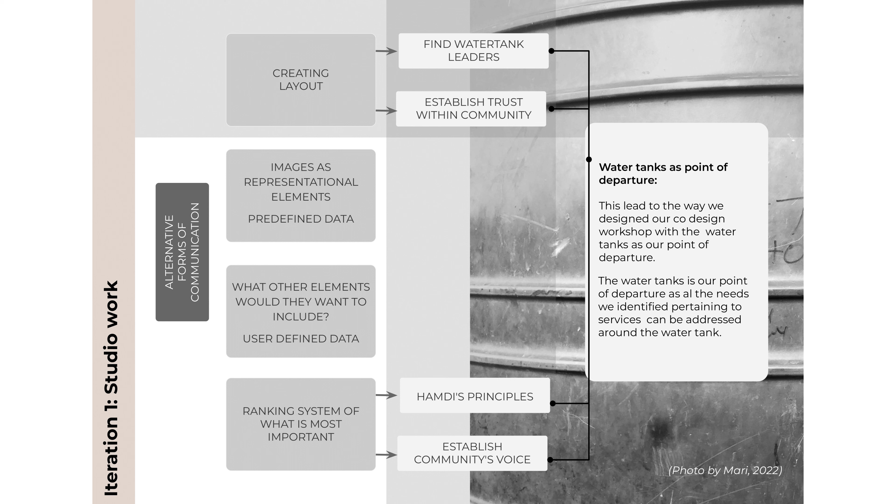Permanence versus temporality. The idea of temporality is established by regulatory aspects prohibiting the permanence of Plastic View within its existing framework. The land is owned by the government and is set out for development planned to happen in the near future. The government forbids permanent structures.

Our interventions are built on the idea of temporality and intend to create a device and spatial node which is easily adaptable, interchangeable, and easily disassembled to relate to its context of Plastic View.

Water tanks become a point of ritual. Water is used as a celebratory splash of life. The women and children celebrate life through splashing water on the birthday person throughout the day.

The water tanks act as a political node during the election seasons, as the different political parties use the water tanks as a communication platform.

The water tanks bring lightness to the community by being a playscape for young children. Through observation, we can see that the children are drawn to the water tanks as it is a central meeting point. The water tanks act as a beacon of life.

Visiting the tanks are an integral part of the citizens' daily routine. Water is core to living and therefore carries so much significance in the community.

We visited Plastic View on the 30th of March to collect qualitative data analyzing the typological layout of the water tanks and surroundings. Drawings of floor plans, sections, vignettes, photography, and videography were used to capture the data.

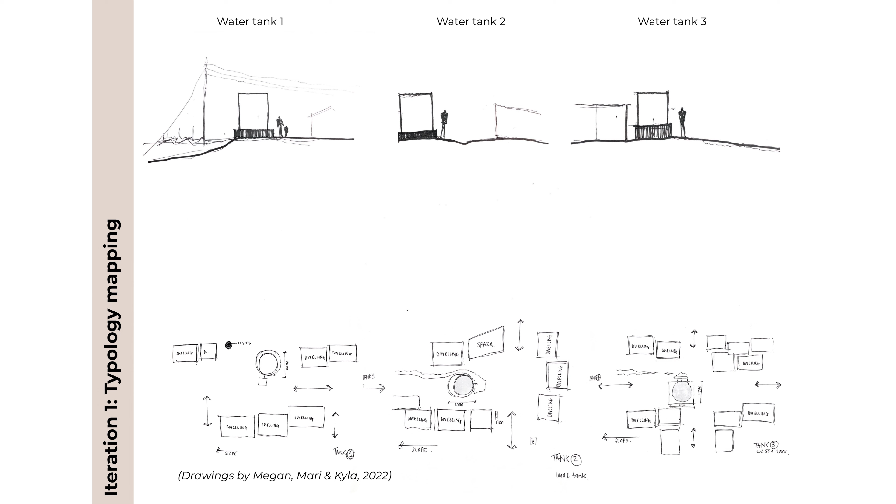nodes. Each tank has its own unique spirit of place resonating around it. Some were hostile, while others were light-hearted, with children playing around the water tank.

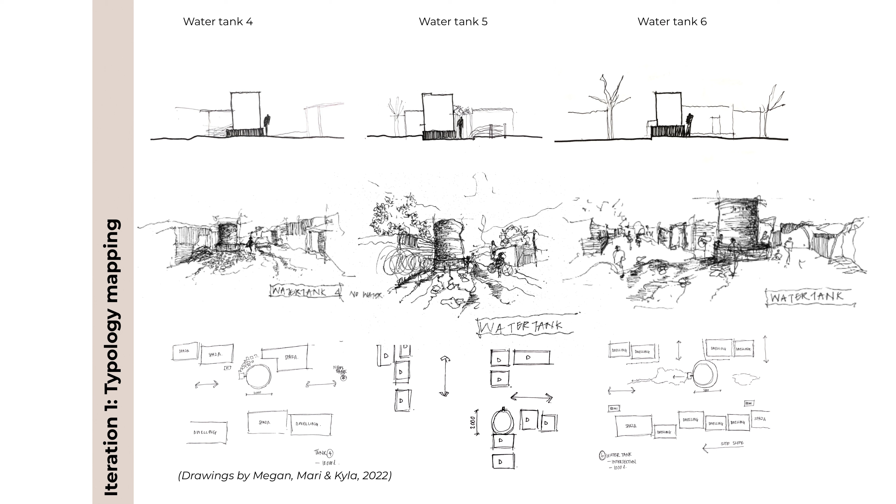The community was overall very welcoming but did not really interact with us spontaneously. Some tanks were damaged, and we later discovered it was as a result of the community having to clean the tank regularly by tipping it on its side to be able to get inside the tank.

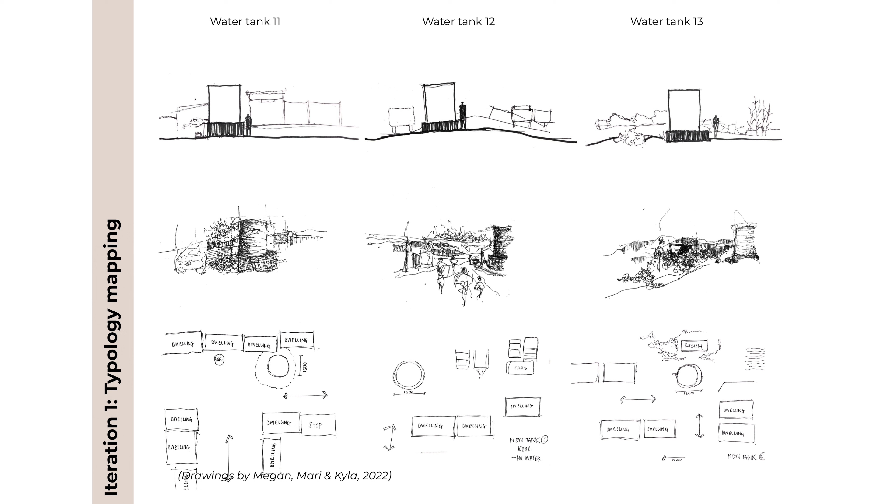Throughout the learnings of Nabil Hamdi, we identified the primary constraints within the community of Plastic View. These constraints manifest through the lack of services integrated throughout the community. These impeding circumstances stand in the way of change, community engagement, health, and the livelihoods of the citizens residing there.

The concept of a catalyst project as a spatial intervention, focusing on providing a service framework to the community, emerged. We investigated only a few indicators to allow for fewer concentrated outputs.

We applied a research methodology by making use of qualitative data collection at each tank. We located 13 tanks and noted that 3 tanks were added from previous mapping.

The observations of different activities around the tank informed our co-design process. We concluded that designing alongside the community members was the most effective way to inform our intervention. This resulted in the water tank leaders acting as our main informants for our short, medium, and long-term interventions.

The potty project contributes to our needs assessment conclusions. The implementation of the private toilets contributes to the community's needs by creating a healthy sanitation service that becomes a safe and dignified place for the citizens. Underground sanitation service pipelines solve the danger of black water in the public streets. This intervention also activates the stakeholders' involvement with the implementation.

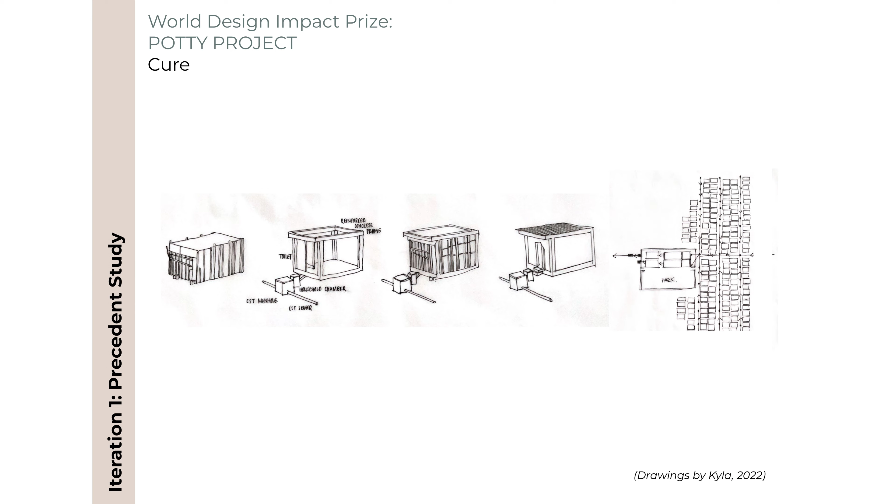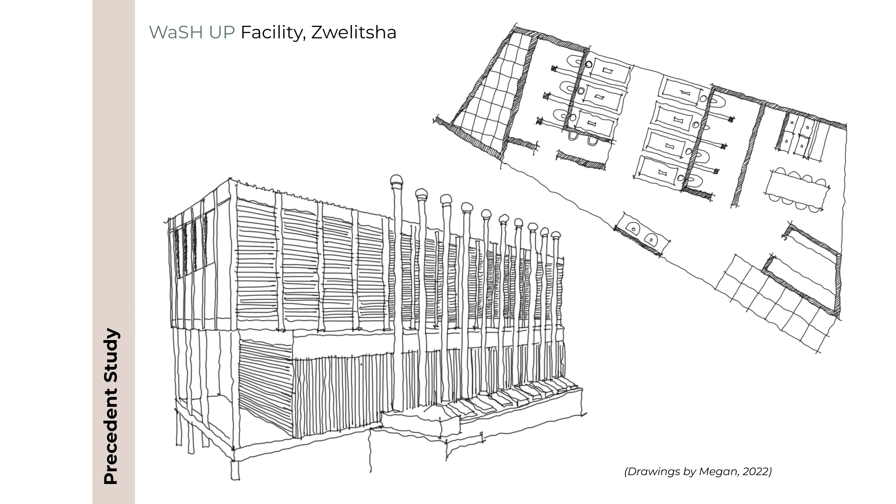The WaSH UP facility in Zwelitsha. The community works with the design team and contributes to the design intervention. The community involvement in the design process ensures that their needs are met as far as possible. The introduction of management that facilitates maintenance encourages the community of ownership of the program. The installation of the dry toilet system minimizes the health risks of the immediate environment. The multi-purpose facility increases the communal social space.

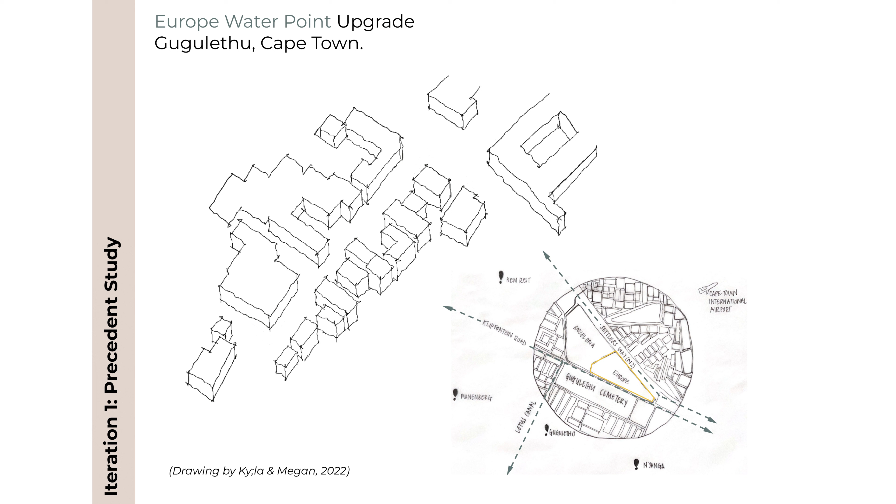Europe Water Point upgrade in Gugulethu, Cape Town by Yes and Design. It's a multifunctional infrastructure that creates a setting of protection as it provides the community with basic services and encourages activated streetscapes and spaces that encourage interaction. Through the addition of pedestrian routes and stormwater channels, the routes become a gathering space for interaction.

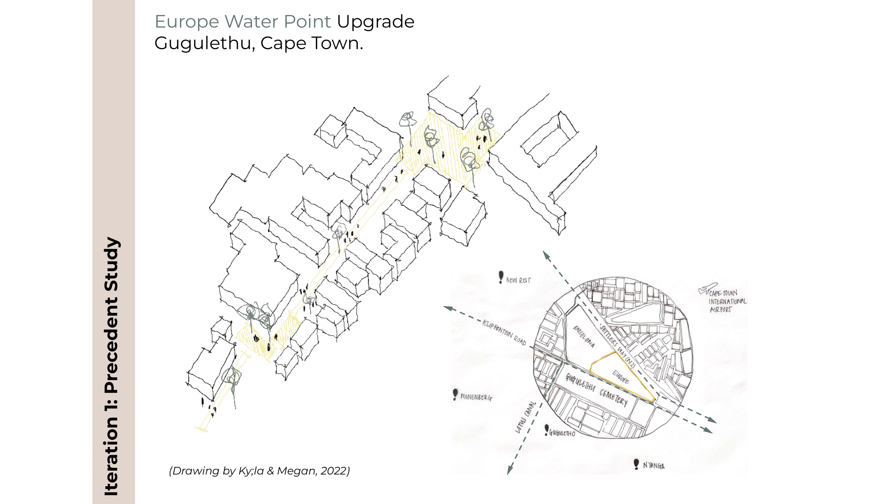Achieving the goal of having a tap point ratio of 23:1 almost halves the amount of people using one tap, therefore providing more water security per person.

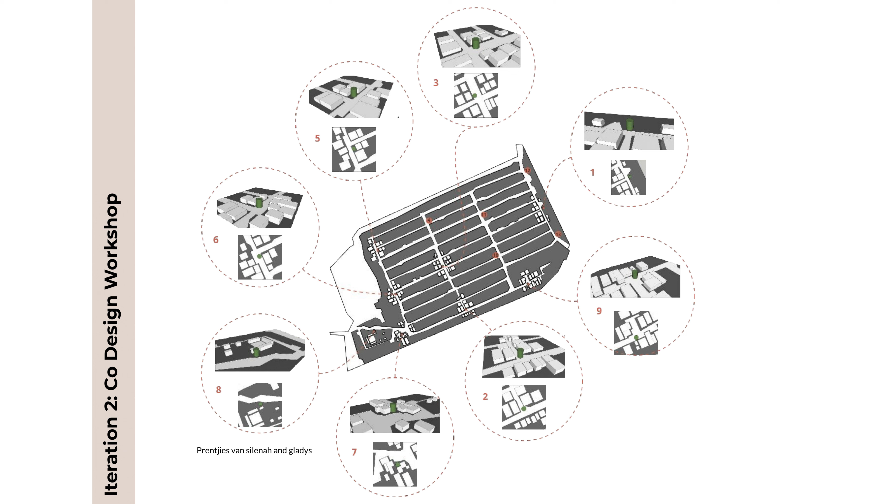On 29 March 2022, Marie went to the community meeting to identify the water tank leaders of Plastic View. These people would then form part of the pool for the co-design workshop. We identified 8 water tanks containing water when meeting with our co-design workshop attendees and decided to focus on them with the help of the community. Silenah and Gladys attended our workshop and shared valuable insight of their daily routines regarding the water tanks.

Our co-design methodology: we created floor plans from the drone footage that we then printed for the workshop. We created a key for elements and spatial interventions that were identified in iteration 1. From this, we created stickers that correlated with the key. This gave the community the opportunity to stick the stickers on the floor plans where they saw fit and contribute to the layout and design of the intervention.

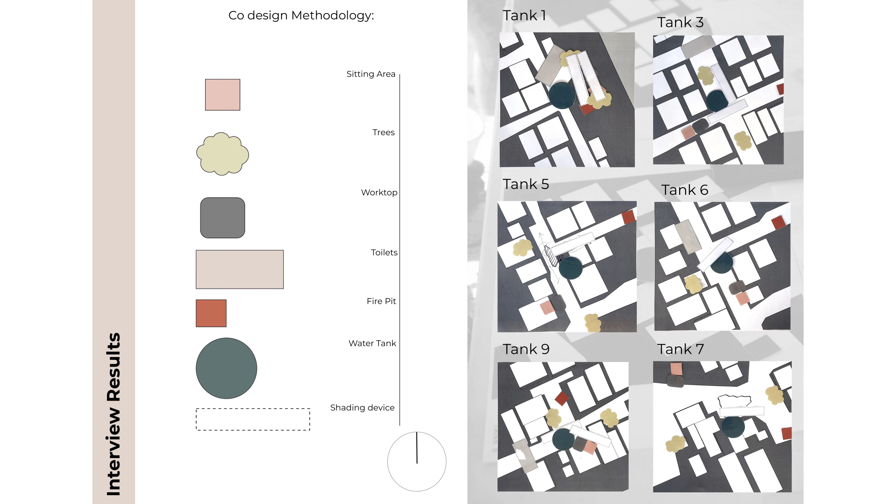We concluded to have ablutions near the water tank for hygiene purposes. Seating facilities should not obstruct mobility at the intersections at the water tanks. Working surfaces should be next to the basins for physical comfort when washing clothing. Raising the plinth of the water tanks will add to the accessibility of collecting water. Allocating more trees will create more social spaces. Light becomes a symbol of safety within the community at night.

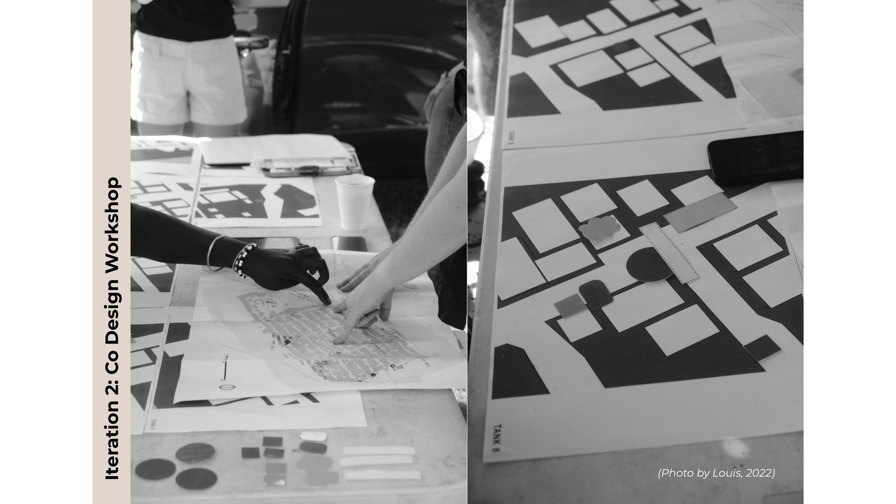The location of each tank is accepted by the community and will serve as a catalyst for our short-term interventions. We concluded that water is more than a service. It becomes a ritual and forms part of leisure, as well as a place for political activity. It becomes an interactive node where children play in an appropriate space.

Certain concerns were also prominent, like the black water surrounding the tanks, which is toxic, and the difficulty of cleaning the tanks. The leaders also raised the issue regarding the inconsistency of the filling of the tanks and noted that they would ideally like to collect water twice a day.

The following is a narrative written after our workshop collaboration with the community, showing that water is more than just water and that water becomes a ritual in Plastic View. The unpredictability due to many social and political factors played a role in the outcome of our interviews, seeing that it changed our information pool.

We set out to interview 2 community members, but only had the opportunity to talk with one, Silenah, and the community member, Gladys. The methods used in our workshop were only successful to a certain extent. Our workshop lacked visual connections to locality and place. Explaining our interventions to the leaders would have helped them to understand the workshop better. We also only co-designed 6 of the 8 water tank layouts with the leaders, but it was valuable enough because we were more interested in the casual conversations we had with the leaders in between the workshop.

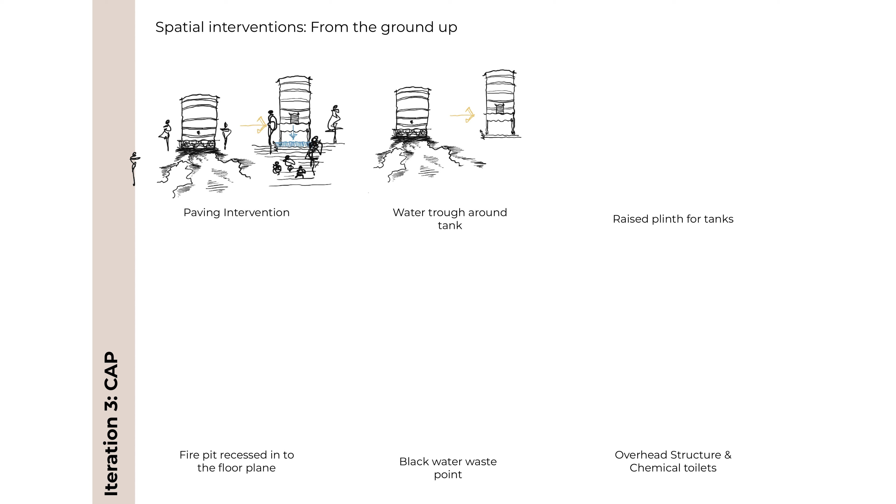Elements such as paving interventions and water troughs around the tanks help with erosion around the tank. This will contribute to reducing the toxic black water surrounding the tanks, and raising the water tanks for ease of use for those community members collecting water for their families daily.

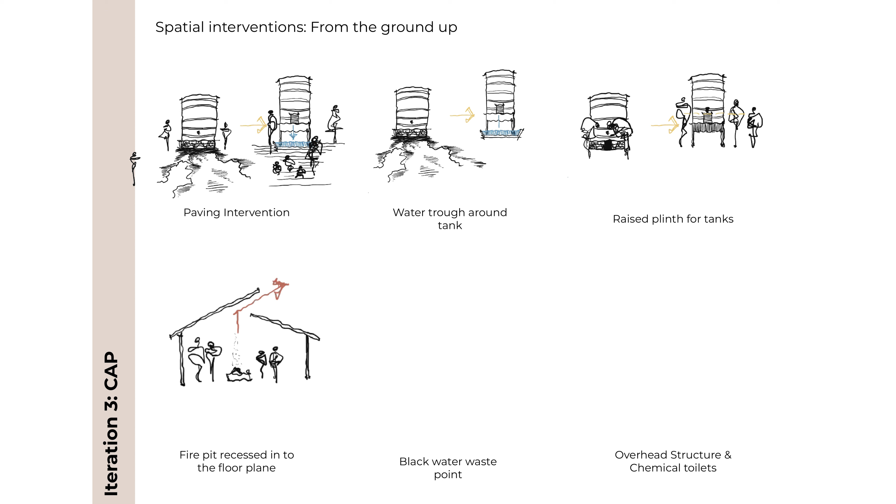Creating a fire pit recessed into the floor plane to act as a communal kitchen area reduces the risk of fire outbreak inside the dwellings. This can also act as a catalyst for economic activity, as the community can appropriate the space to sell prepared food. Specific black water waste points are allocated to empty black water buckets.

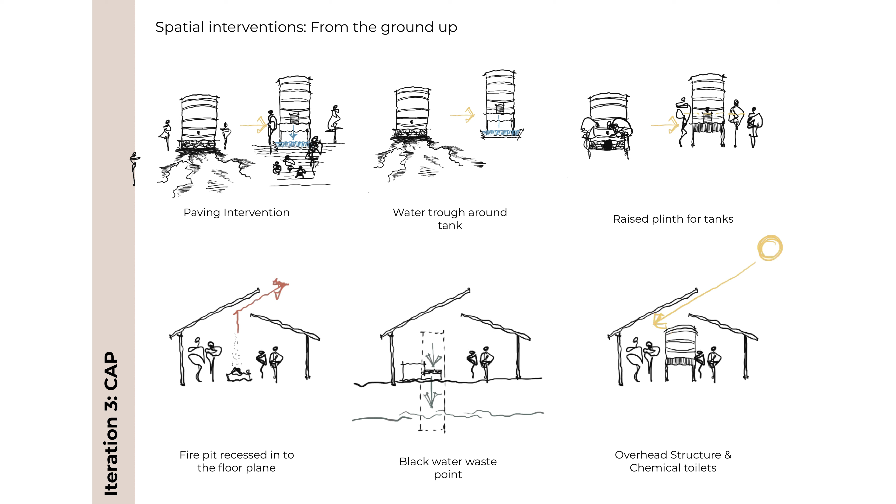Overhead structures acting as shelter, defining a communal space around the individual tanks, will act as rainwater catchment systems. The water collected from these overhead planes will then be used in the wash basins. And lastly, chemical toilets can be installed to function independently from any municipal water supply.

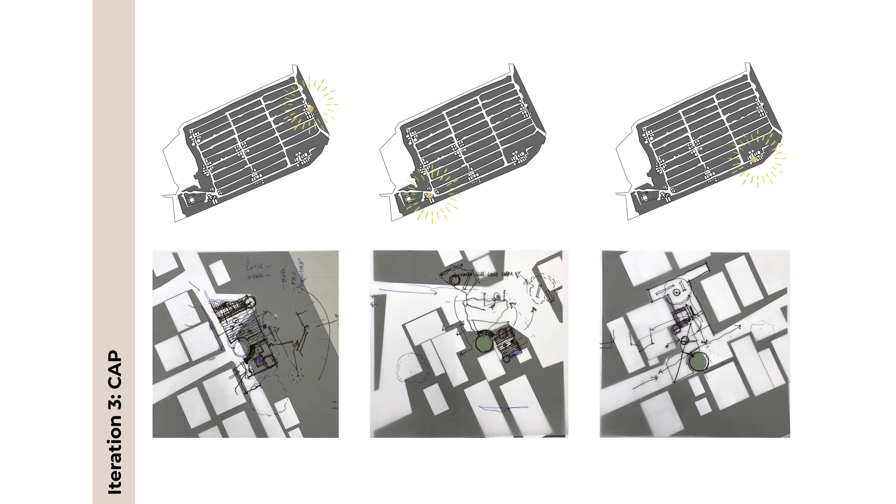Our design approach: by choosing 3 different typologies, we can address the spatial layouts of the wet space interventions we aim to integrate with the community. These 3 interventions systemically integrate with any of the 13 water tanks, applying our spatial interventions with the community's feedback in mind. When considering short-term interventions, we suggest a multi-use wet space surrounding the water tanks to act as a placemaker for the community.

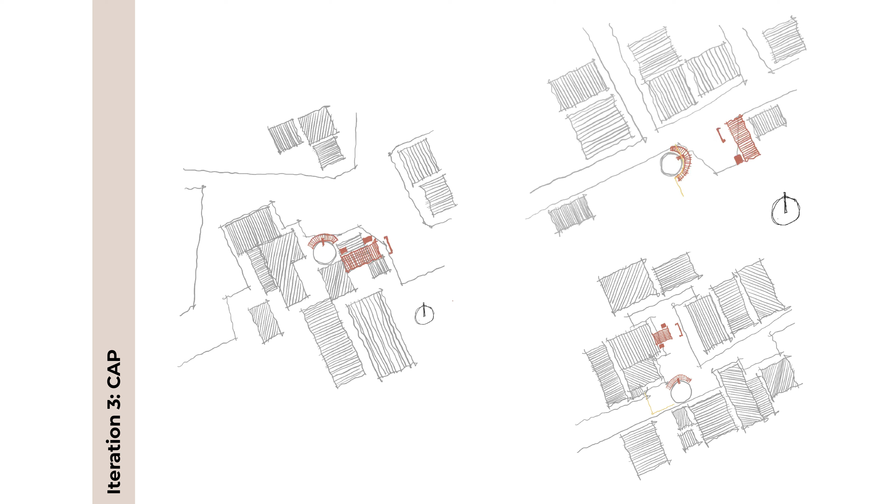Shade, water, sanitation, proper drainage, and leisure spaces are all present in each wet space node. Our suggested intervention is easy to disassemble and is seen as temporary. The first phase of this intervention is a surface covering, raising the tanks, and allocating water dumping areas.

Medium-term interventions will include the entire node, with all its components actively working and integrated with the community. The community members can then also appropriate these spaces as they please.

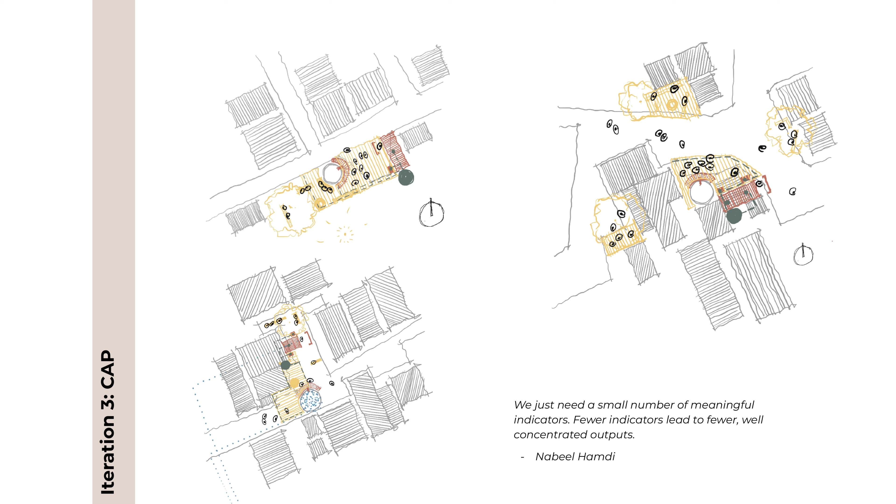One of the biggest implications currently, through the eyes of the community, is the unpredictability of water supply. During our interview with 2 water tank leaders, they raised their opinions about the troublesome water tank drivers who don't consistently deliver their services.

Long-term interventions will be the extension of the existing identified municipal water line to all existing wet nodes to allow for a constant flow of water to the community.

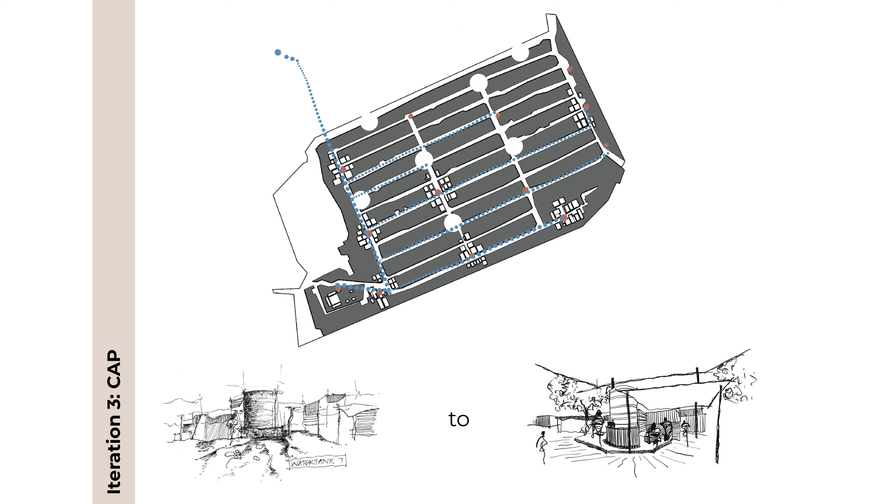Tank 1, focusing on safety. The intervention at Tank 1 is based on the safety and vulnerability of the community members at night, seeing that it is located next to the main light source in Plastic View.

We intend to move the tap from the streetscape to an area less pedestrian heavy. This will allow us to create a waiting space for those collecting water. The overhead structure can be transparent in materiality to allow the artificial light into the sheltered space at night.

The idea of temporality is still evident in the materials used to create this wet space node, relating back to the essence of the built framework of Plastic View.

Tank 7, the plaza. The tank allows us to connect all edges of the existing intersection in Plastic View. By placing our intervention in this way, a plaza typology is created. This threshold is used by pedestrians as well as vehicles, and by creating allocated gathering spaces surrounding the intersection, safety and order is addressed.

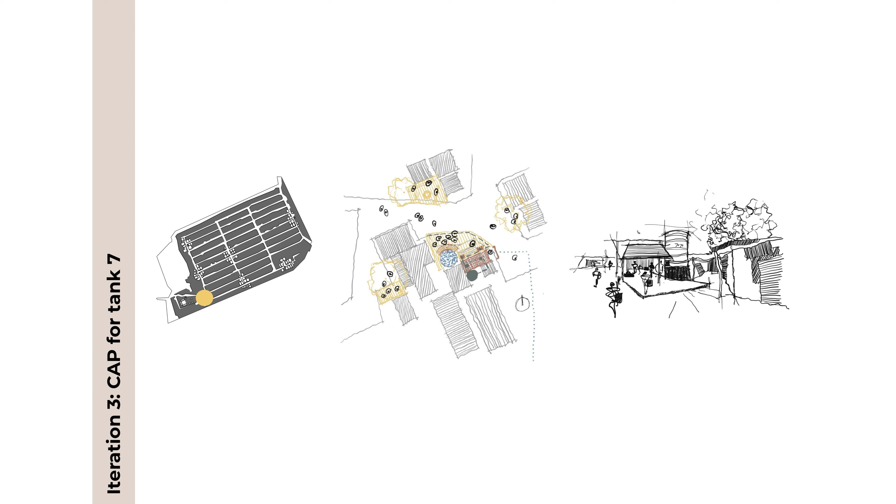Tank 9, the pedestrian tank. This tank is situated on a pedestrian path, which allows our intervention to spill into the streetscape and existing courtyard typology. The water tank will stay in its original location.

An existing fireplace will be used as part of our intervention next to the tank to create a communal cooking area. An overhead structure will span from the water tank tap to the proposed fire pit to create shelter. The chemical toilet enclosure creates a threshold to allow for an intimate courtyard space just off the main street.

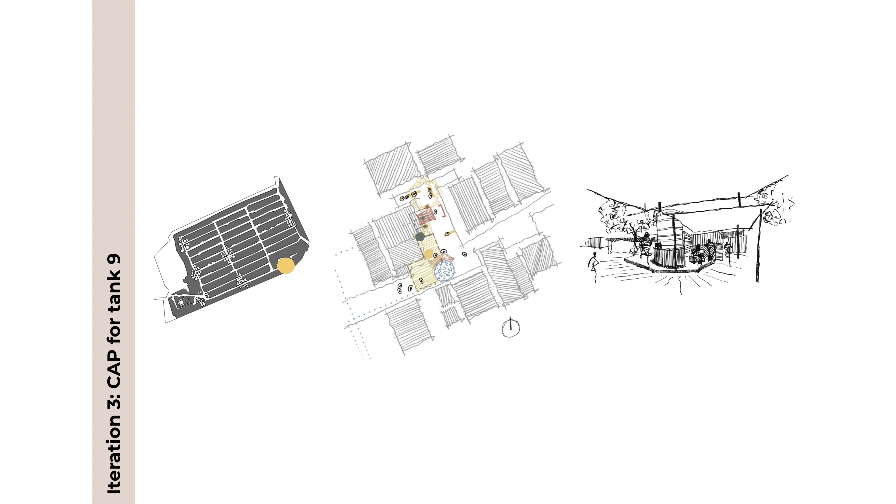Consolidating our findings, our time spent in Plastic View has allowed us as designers to synthesize the intrinsic need of the community into an immediate catalyst project, which will allow the intervention to grow and expand over time.

We consider the idea of temporality and relate our design process and catalyst project back to this undeniable essence of Plastic View. This settlement is temporary, but exhibits patterns and elements intrinsic to permanence, a community wanting to be permanent.

A spatial node which can be appropriated and adapted by the community to become their own. A structure which can encompass the sense of placemaking and being.